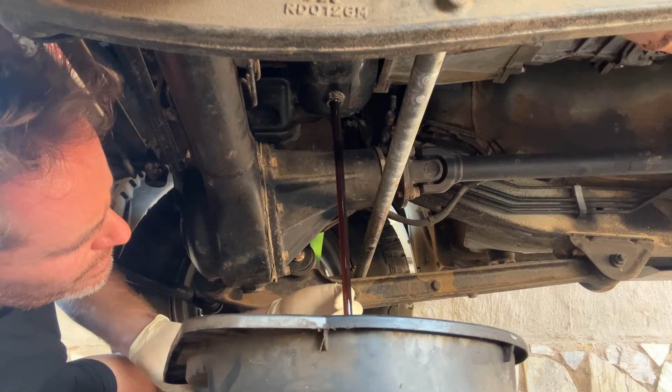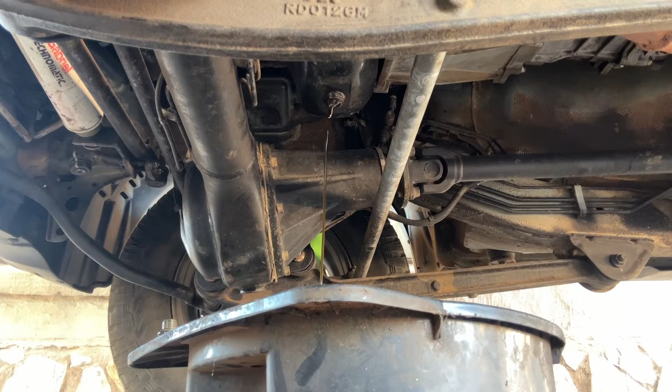Luckily this wasn't too tight, because sometimes they are quite a mission to get off. Okay, O-ring is still there.

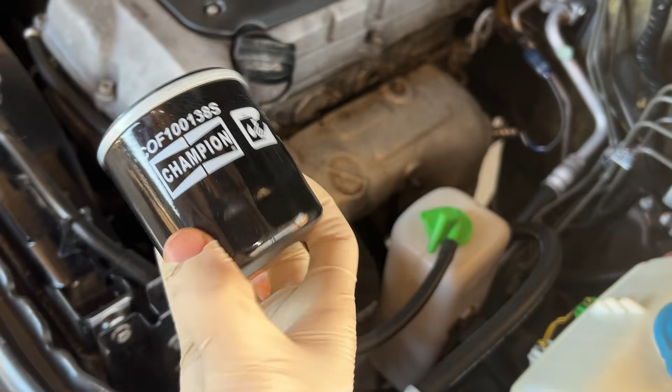Okay, so this is the replacement filter I received. It's a bit shorter. It's a Champion, not the GUD. So I hope that's okay.

Just going to lightly lube it there, clean the mating surface down there, and then thread it in.

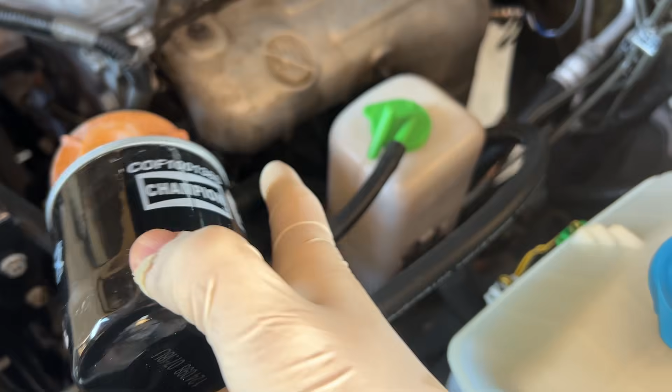I almost always reuse these washers because I don't know what size to get. This one looks pretty good, but I might replace it if I have the correct size because I bought a few. It looks spot on. So I cleaned the drain plug, washer on there, and we'll stick it back in.

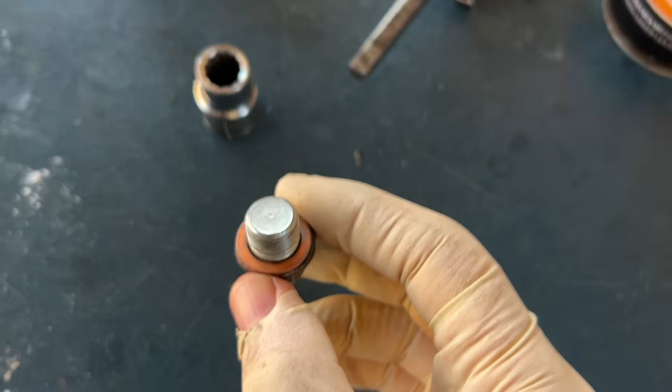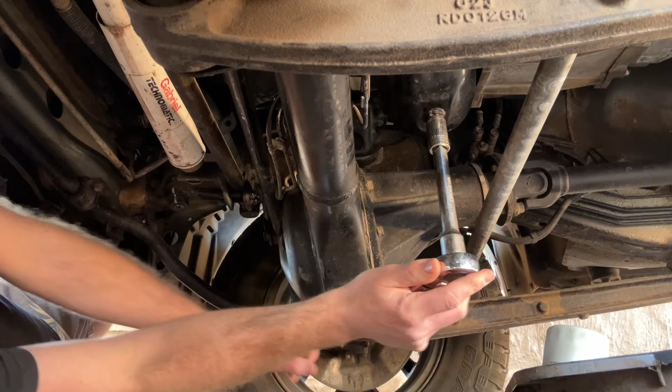The manual calls for 50 Newton meters of torque for the drain plug for the petrol engine.

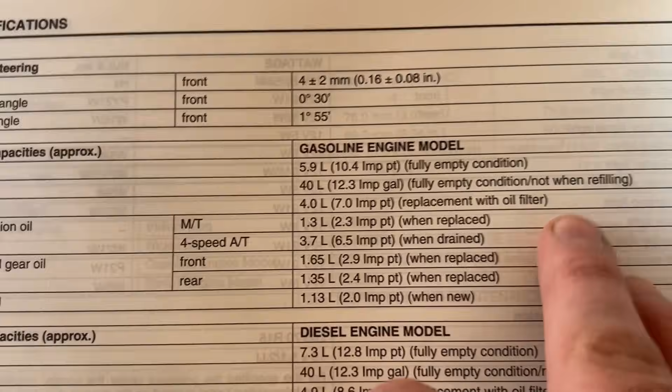And engine oil, 4 liters if you replace the filter. So that's what we'll do next. Just going to get a funnel.

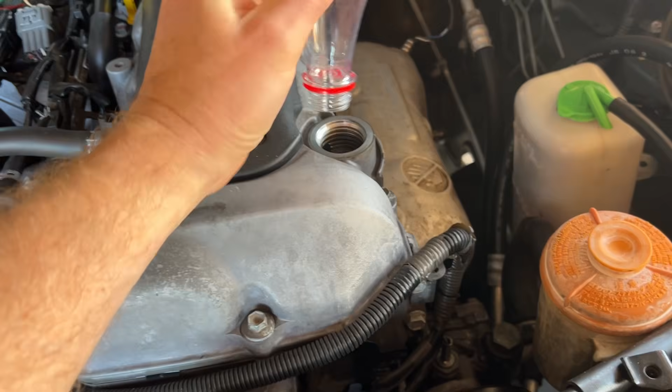Perfect. Full synthetic goodness, very expensive. So this is 3 and a bit liters. I'll pour all of it in and then check the dipstick.

1 rand, 2 rand, 3 rand, 4 rand, 5 rand.

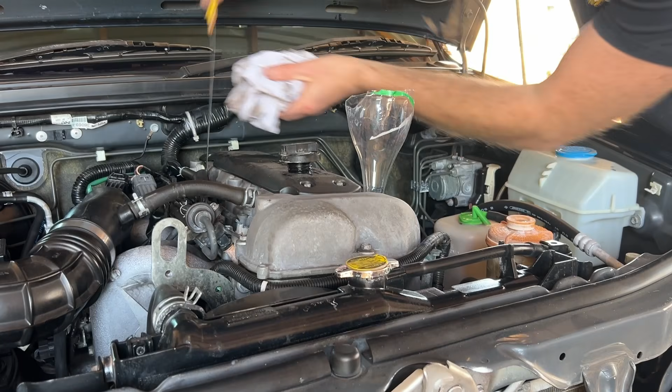Showing up on the dipstick, so I'm going to drive it like this and then we can recheck after a few kilometers.

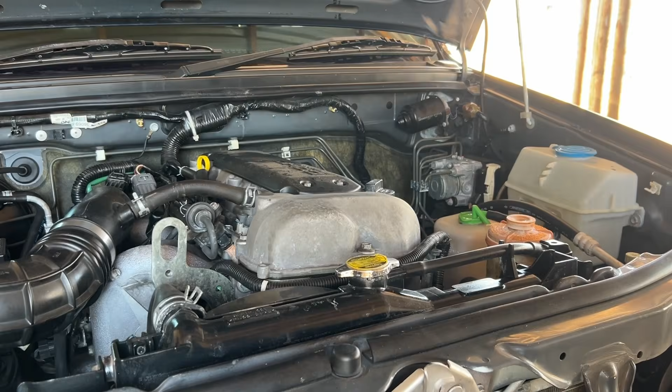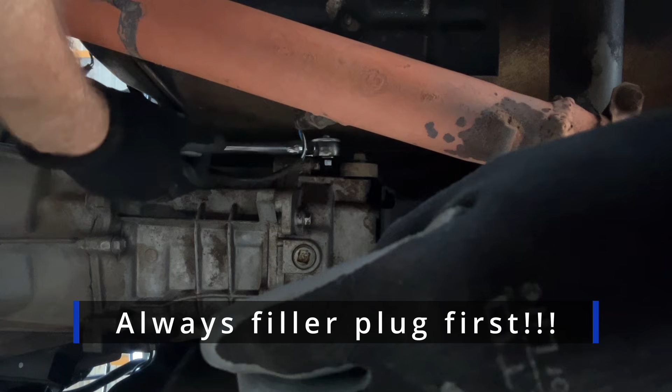What a mission! But if you take your time, it'll come out. But those sensor wires are also a bit in the way. And then square tubing over the end.

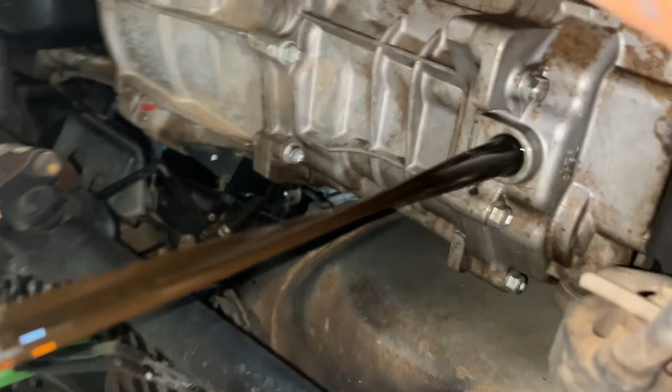So I've cleaned the plug, that magnetic plug. There was a bit of metal filings, and now we're torquing it to 27 Newton meters.

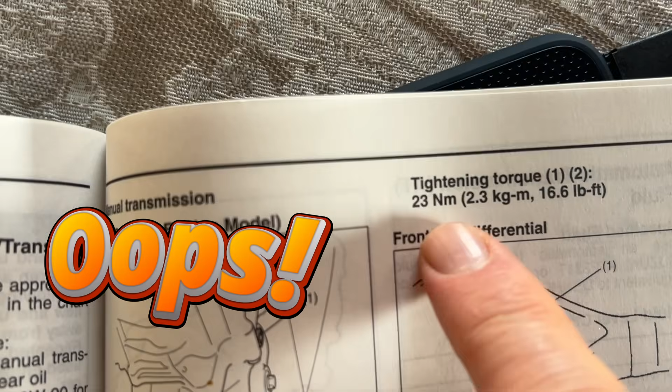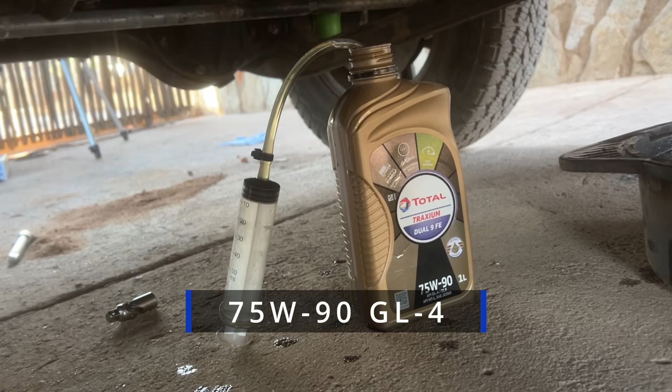It is quite a messy process. It's a tool I'm using. I can't film it, there's no way, because I'm gonna get my phone all full of oil, but I guarantee you it does work. So I'm gonna keep going.

Okay, managed to fill it up so it's dripping out the filler hole, so that's full.

And now to get the drain plug back in there.

Okay, so I got the plug back in. I didn't torque this one down, but that's less important than the drain plug.

It's pretty tight, it wasn't that difficult, it's just patience. This one I torqued to 23 Newton meters, and that is your gearbox oil.

I must admit, I think it's easier without the cat, because this one's got a deleted cat, so there's just a straight pipe. I think on the standard one there's a big box here, which makes it very difficult.

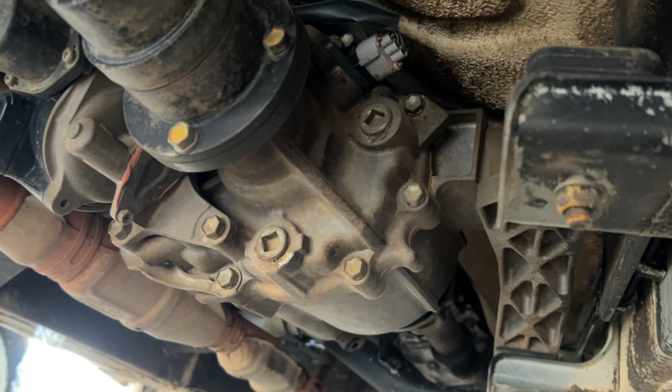Next, we're doing the transfer case. So, filler plug, drain plug. Remove the filler plug first to make sure it comes out before you drain the transfer case.

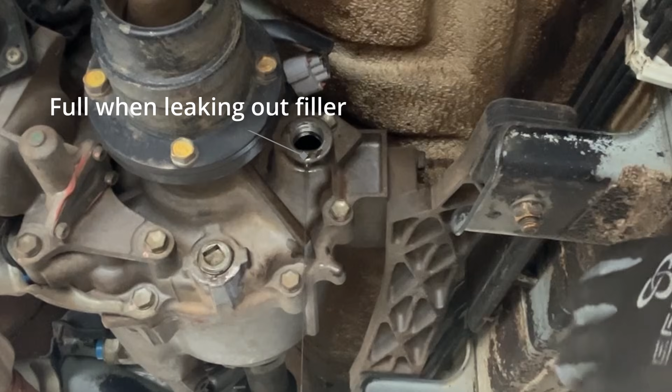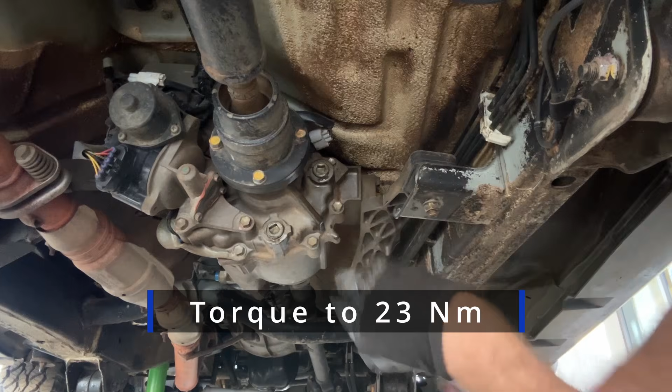Hi there, we're under the 2010 Suzuki Jimny, and we are going to change the rear diff oil in this video. First step is to remove the filler plug.

You want to do the filler plug before the drain plug, because if you drain all the transmission fluid or the axle fluid and you can't get the filler plug out, you're screwed.

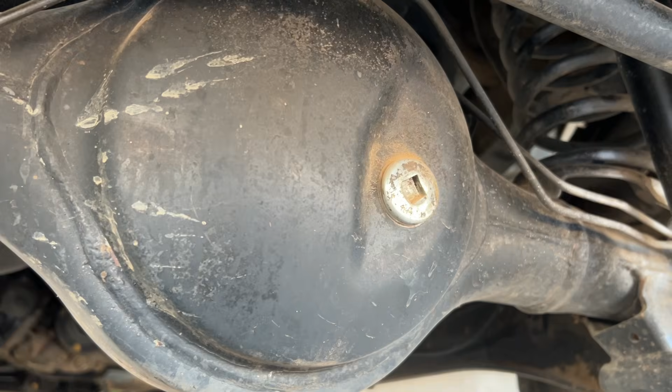Why did they do this type of drain plug? If it was a hex or just a normal 6-sided bolt like that, it would have been way easier for a DIY mechanic to do it.

But we're going to try with a, I think it's a 3/4 inch drive. So this is the only one I have. It's a ratchet with a bendy bit at the tip. That's all that I have. So I'm going to see if I can get this loose.

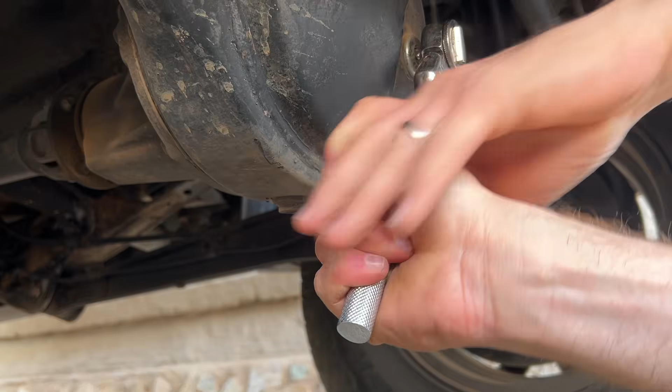So maybe it's not that bad. It actually came out quite easily with just a normal 3/8 inch drive.

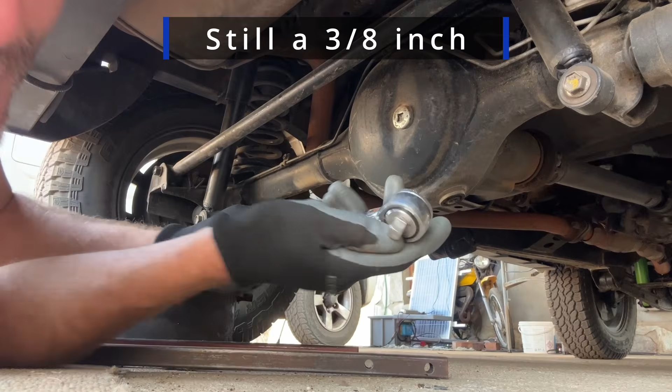Okay, so I fitted some rubber gloves just so I don't get a mess all over myself.

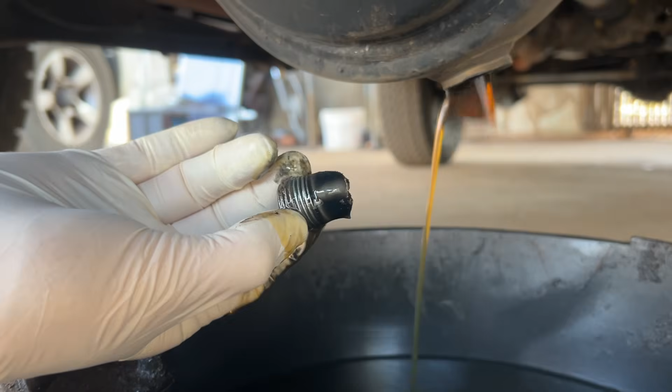The oil that's coming out of the diff is not that bad, but you can see on the plug here that milkshake-looking goo, and that's because there was a bit of water in it.

So it's a good thing we are changing this out. Okay, we can also remove the filler plug now.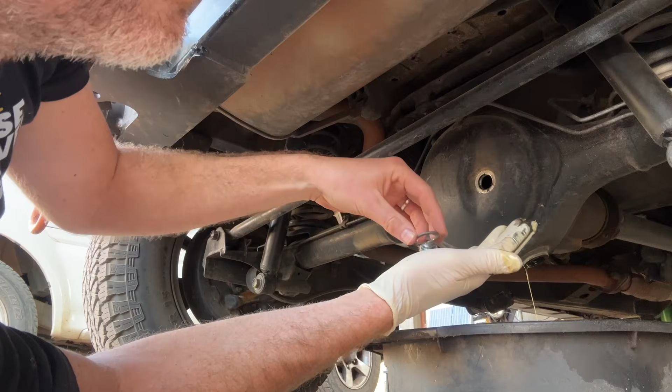You can see there is a paper gasket. We'll keep that one. I didn't see a washer in here.

Oh, it's because there is no washer, because it doesn't have a flat surface. It goes all the way in.

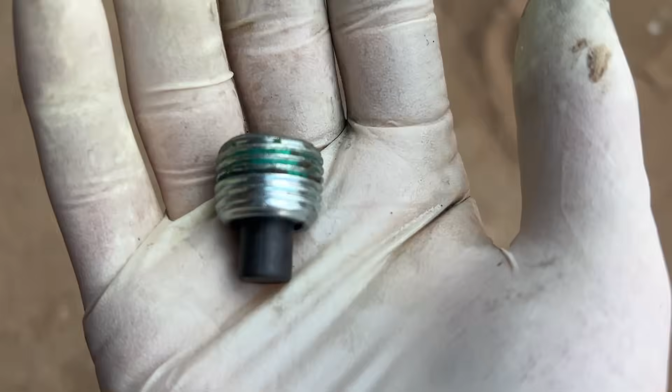So I cleaned it properly. You can see now why there's no washer or gasket, because this just goes all the way in, so it seals with the threads. There's a little magnet, and this whole thing was caked or gunked up with that milkshake goo from the axle oil mixing with the water.

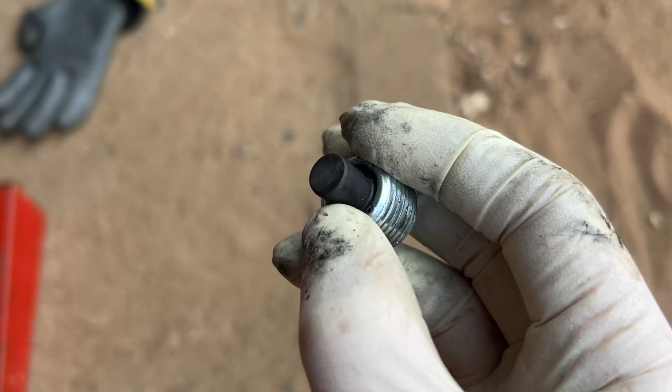Okay, we can put the clean drain plug back in.

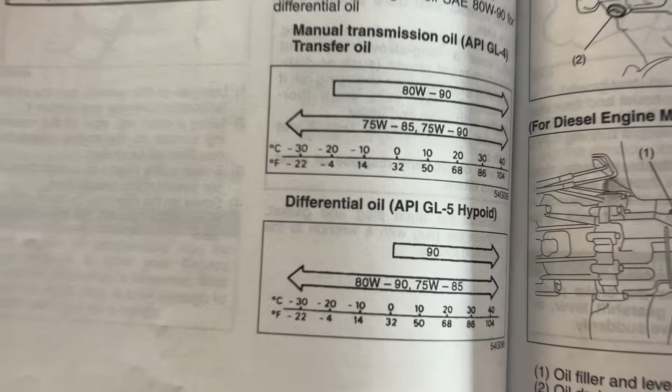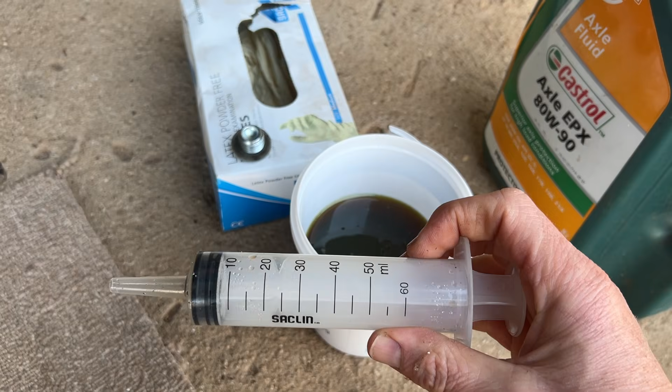So this is not the quickest way to fill it, and I'm not going to pour it out of that bucket. No, I'm going to use a syringe, 60 ml, so it's going to take at least 20 fills to fill it up until it starts pouring out the hole.

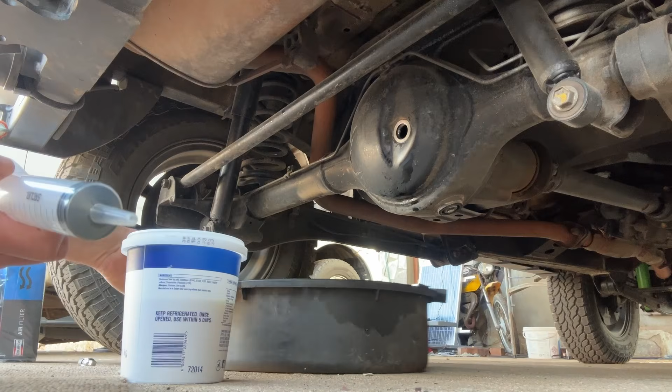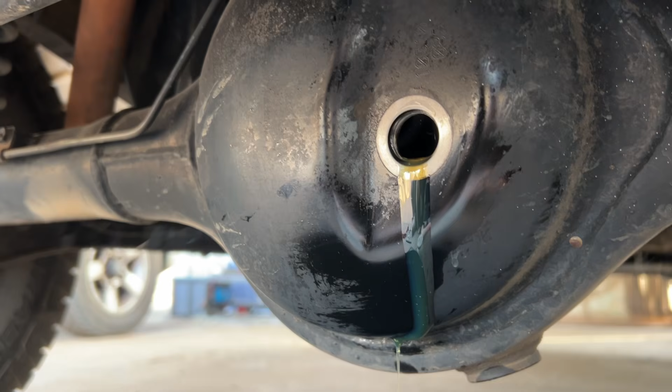When it starts draining out the filler hole, you know it's full, and you can refit the filler plug. I also cleaned this filler plug, and its paper gasket still looks good, so I'm going to reuse that, and we're just going to nip this up, and then we're done.